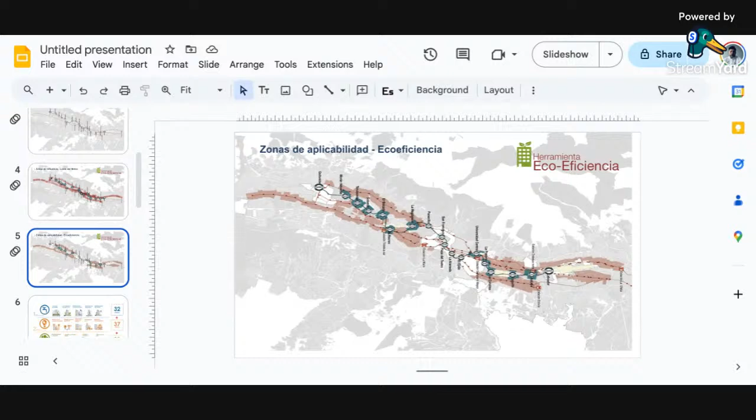So with this urban strategy in place, we developed this legislation in three layers. One layer mostly focused on the consumption of water and the treatment of the water after it was consumed.

The second layer was energy, related first to the actual consumption of energy, and on the other side, the transportation and the energy that represented. And the third layer was a group of environmental parameters that the building should apply. There were some points for every layer, and for as many points you get, more stories you can build. Pretty much that's the idea.

Okay, wait, can you go back? Can I ask you a question? Is this an order of hierarchy as well? Is it more important to watch your water consumption rather than your energy consumption in the city of Quito? Because this is something I was wanting to ask you as well.

Yeah, that's interesting. In a way it is, the fact that energy has two parts: energy itself and transportation. Transportation, the mobility in the city, gave importance over the other parameters. But water has just one layer of itself. That's because, as I told you previously, Quito doesn't really have problems with temperature and comfort because of the climate conditions, but water is a major problem in the city. It's the major problem in the ecological footprint of the city that we have to address, so we can develop a legislation that is more accurate to the actual problems of the city.

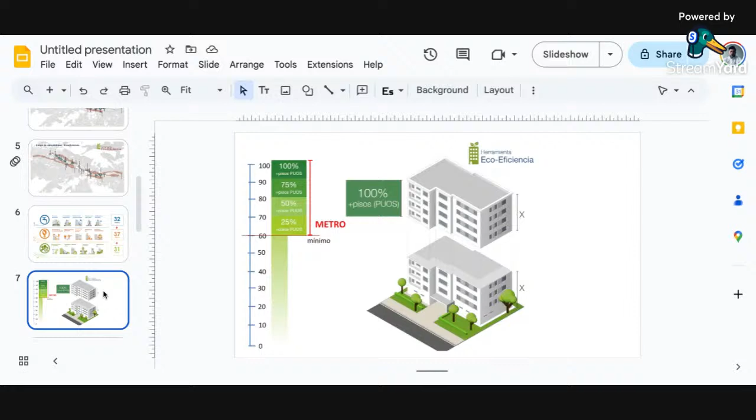And then once we applied this legislation, I wanted to show you some projects I worked on applying this legislation.

Okay, go ahead. This, for example, is Project Harmony. This is a project for a construction company that I worked on as a consultant for them, applying this legislation.

And it's interesting because at the beginning they didn't really think about this as an important matter. Sustainability was something that was applied, not something that was transcendent for the impact of the buildings in the city. But after this, they started to develop a conscience about how important it is, right?

So this is a building in the center of Quito. Correct me if I'm wrong, but you're saying more or less that they applied sustainability as an afterthought rather than something from the start. Is that what you're saying?

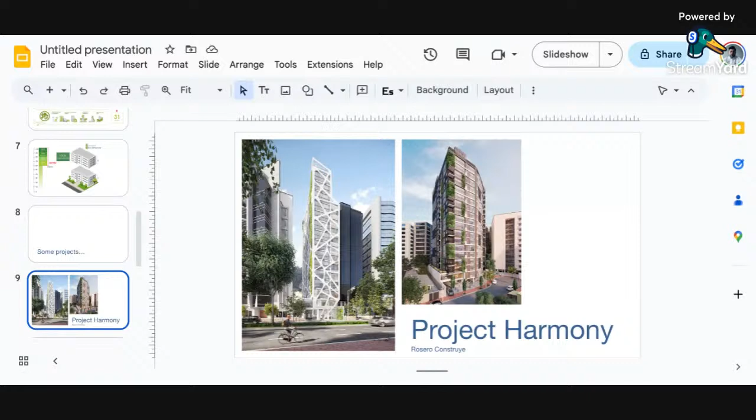Yeah, in a way they did that, but also initially it was more like that, but also it was like a marketing thing. It was like a strategy to sell a building. Can I ask you to go full screen on your presentation so that we can see your slide?

Okay, yeah. So these parameters were like 10 to 20 parameters, which in whole summarize like 100 points. You needed at least 60 points to be able to apply to this incentive.

And as many points as you get, you could build higher. So if you apply the whole 100 points, which I would imagine is very hard, you are able to build twice as much.

Twice as much, exactly. So that's the incentive also for them to hire you as a consultant, I would imagine, or in some way. Yes, yes, that makes sense. It's interesting what you're getting at.

I'll let you now describe Project Harmony, but this is something I wanted to address: how you deal with sustainability there in Ecuador, in Quito, and compare that to how we deal with it here in Belgium, Brussels.

Now, I'm going to be honest, I'm not entirely sure if there are schemes for developing this kind of project with bonuses for sustainability here, because I don't build at that scale. I'm not there yet.

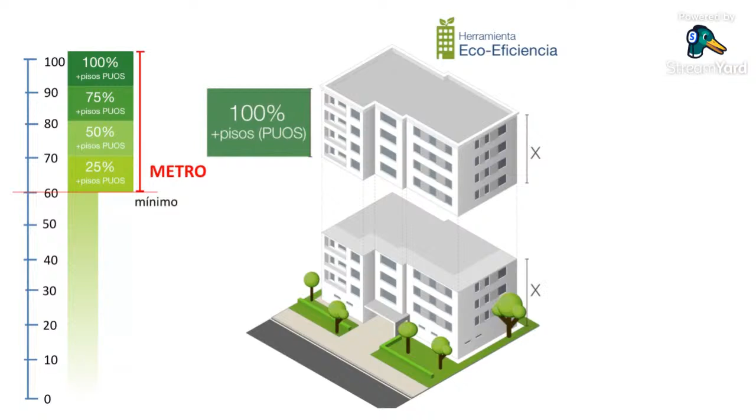It was, it was. So that's just one project. Because of the time, I tried not to be so extensive in my explanation. But this building is a building built recently, finished, let's say in the economic center of the city.

Like in the area of high value of the city. It's a residential building with mixed use. They have commerce in the lower floors, some offices, and they have two fronts. It looks like different buildings, but actually it's the same building, very square, weird shape.

Some of the interesting things is that this building reduced, for example, the amount of parking spots compared to other buildings with the same characteristics. This is because they applied this legislation, and they made a statement about mobility.

This is very close to the metro station, the tube station. So they have very small housing units, without parking spots, so people could move without a car, and they have a lot of infrastructure for bikes and co-working and things like that.

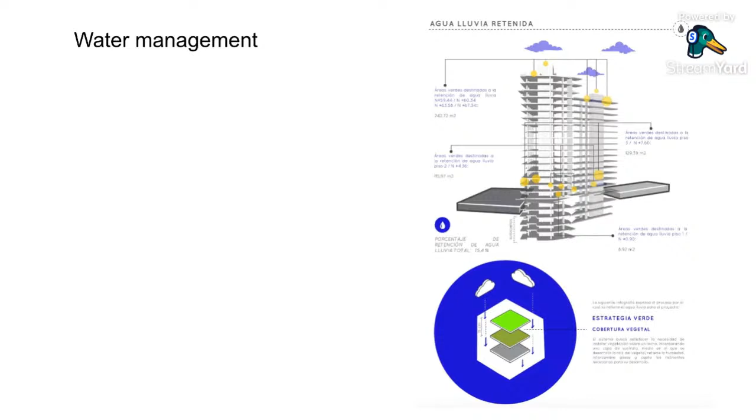So it's not very common. The building made an effort to keep the water inside using green surfaces and storm tanks as well.

In terms of energy consumption, we made a strong effort using very efficient appliances for lighting and water heating, which are the most important energy-consuming appliances in this country.

It's a mixed-use building. One fourth of the building is not residential, and three-fourths of the building is residential.

The demand for water heating is basically in the residential areas. This building in particular is three-fourths residential, and as we don't have this need for heating or cooling the interior spaces, the largest amount of energy consumed is water heating. So we used very efficient heat pumps for heating the water for the whole residential section.

Common heat pumps in this building, and we made an effort for very efficient lighting and other equipment.

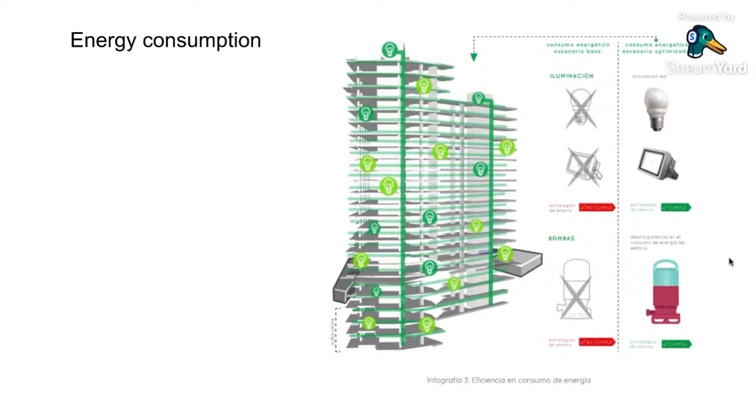In terms of urban vegetation, it was interesting because it interacts with the heating and the water retention of the building. It has lots of areas with green coverage, and we also have urban agriculture areas on the terrace, so people could go there and do some urban agriculture, some communal spaces for the residents of the building.

I don't want to get too technical, but we studied all the native species that should be planted in these areas. It's not just grass and some trees — they have an ecological function with the birds and insects that interact with these species, and we determined the amount of vegetation needed to have an ecological function in the building, like a beacon of vegetation that interacts with other species.

These are adapted to high altitude, it's 2,800 meters. The conditions are not obvious because it's like a mountain climate.

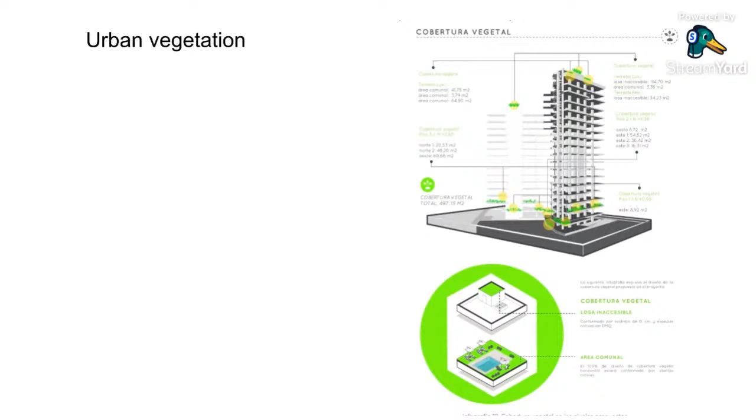Finally, we did studies and simulations of thermal comfort, trying to get into an acceptable comfort band without the need for assisted heating or cooling of the building.

Yeah, so that makes sense. This brings me to another question I had. Sorry, I keep talking over you. But no, not this way.

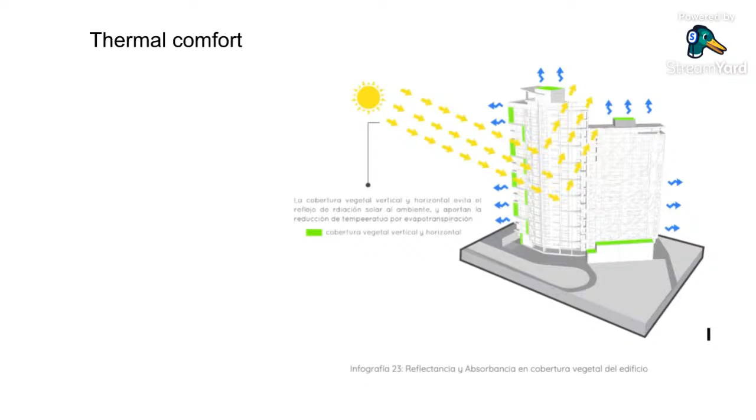This brings me to a question I had when you explained the layout of Quito. That was very interesting - you said Quito is about 80 kilometers long and 10 kilometers wide. Does that mean... let me show you in 3D. But what does 'long' mean here? Is it east to west, or north to south?

So long is north to south, okay. Now regarding north-south, Quito's axis along the city is north-south. So here you have 80 kilometers from north to south, and 10 kilometers from east to west. Okay, so here you have the mountains, and over here the valley.

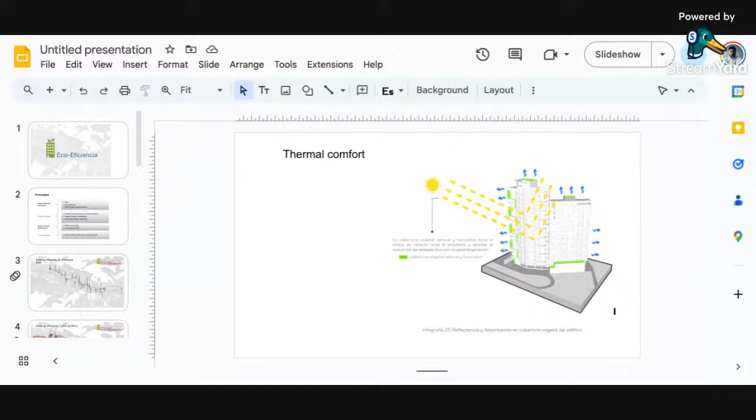Now going back to your projects and precisely thermal comfort - you say that cooling is something, and heating is not required. But what about culturally? Has Ecuador, and Quito particularly, been affected by this international style of having spaces be extremely cold during the warm period, or vice versa?

I mean, not really. Let's say that Quito has like 10-20% of the areas located in the center of the city.

Hola, Pedro. Sí, sí, you there? Yeah, I'm here.

Naturally, we don't feel the need for heating or cooling. It's not a cultural thing that people don't feel these as needed. In some cases you have small heaters, like you get in stores, but it's not important - it's not integrated into the buildings.

I think, in a way, this is personal - the influence of young architects studying sustainability in other countries, where they learn the needs of different latitudes, and they try to come back to Ecuador and apply these strategies. It's not always effective.